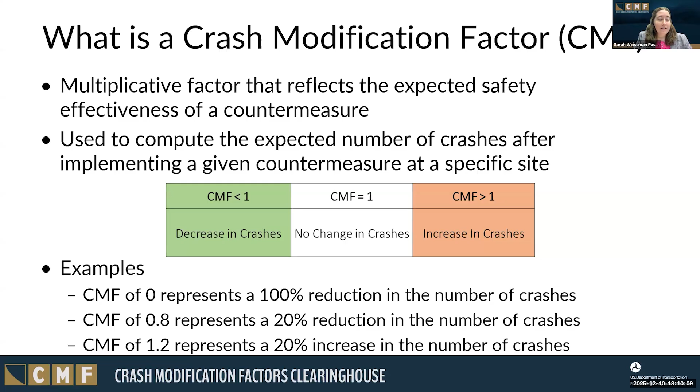The CMF Clearinghouse is a central repository where we strive to store every CMF that has been developed by universities, transportation agencies, and others around the world. It is regularly updated, typically every quarter, and provides practitioners a way to search for and use the good work you all do to improve safety. We also have information posted on the website for your use in working with and understanding the methodology for analyzing CMFs, as well as links to research, case studies, and trainings.

Plus, the CMF Clearinghouse also hosts state-selected CMF lists. Several states have developed their own internal state CMF lists, and generally the states compiled these lists so that there would be consistency in CMF use across their state. These CMFs were identified from the CMF Clearinghouse as well as other resources. Thanh will show you a bit more of the website functionality shortly. Okay, next slide, please.

So poll number 2. We're always interested to learn how you use the CMF Clearinghouse. We have a poll to help us find out how much you use the Clearinghouse. Please answer how often you use this resource in your day-to-day responsibilities. And I believe it's going to ask the second question too.

Next, we'd very much like to understand how users handle multiple CMFs for the same countermeasure. As a clearinghouse of CMFs, it's not uncommon for multiple research studies to calculate CMFs for the same countermeasure, resulting in multiple options, sometimes ranging from a reduction in crashes to an increase. In these instances, how do you, as users, select the CMF you use? Do you select a single CMF or do you combine CMFs? So go ahead and post the poll, please. Let everybody have a chance to respond, and then I will take a look at the results.

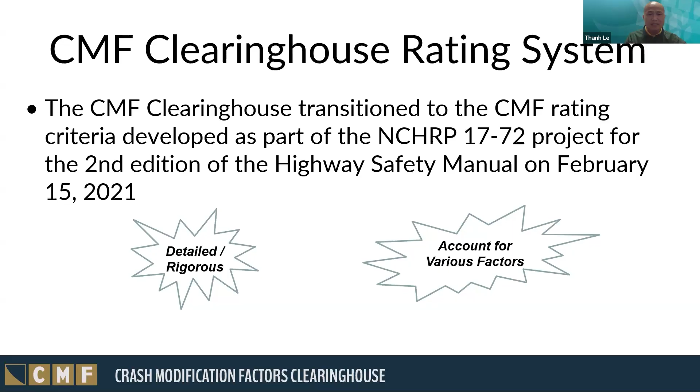So in the website, we will find a section that provides more detailed descriptions of the new quality rating systems, and you can find it from the main page or under the About Clearinghouse menu. And under that drop-down menu, we can find more details in the description of the methods.

So that's all I have on the overview of the Clearinghouse and some of the resources that you may find useful. Please reach out if you have any questions, and we are happy to answer.

Now we move on to Frank, who's going to have a discussion of the challenges, lessons learned, and recommendations for developing combined CMFs. Hey everyone, I'm Frank Gross with VHB. This presentation will focus on how to estimate the combined effect of multiple countermeasures. And this relates to situations where you are considering the use of multiple treatments at the same location. It does not address how to combine multiple CMFs for the same countermeasure. That's a topic for a different time.

In this presentation, I'll try to address these questions, starting with what is the difference between CMFs and adjustment factors. Then we can move on to how to estimate the combined effect of multiple countermeasures and what are the most appropriate methods. And finally, I'll touch on how many CMFs or adjustment factors can you apply at the same time.

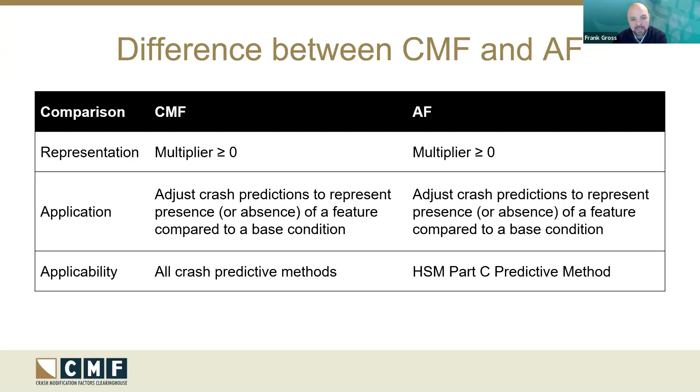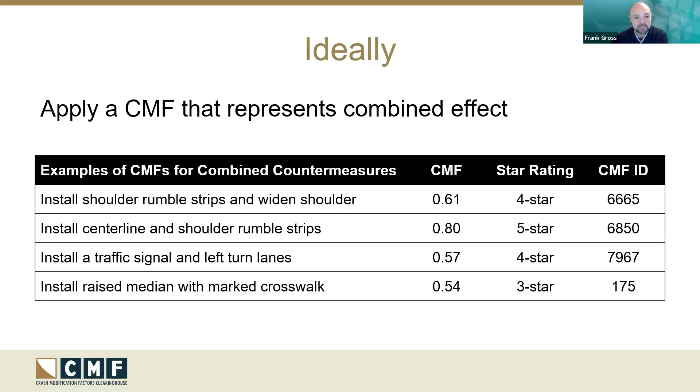For the next part, we're going to focus on CMFs and how to use multiple CMFs to estimate the combined effect of multiple countermeasures. In an ideal world, a single CMF would be available that represents the effect of the combined countermeasures. And if you have that, it's relatively easy to use the CMF to estimate the change in crashes. For example, the CMFs shown on this slide are available in the CMF Clearinghouse to represent the combined effects of multiple countermeasures with a single value.

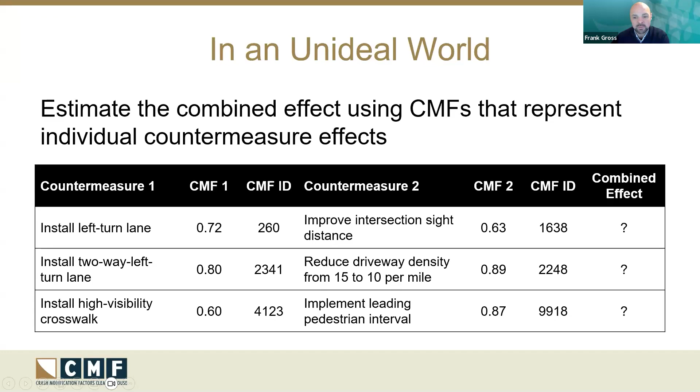However, we don't always live in an ideal world, and you may need to use multiple CMFs to estimate the combined effect. And as far as I can tell, there are not CMFs available for the combined effect of these individual countermeasures. So, for instance, if you wanted to install a left turn lane and improve intersection sight distance, you'd have to somehow use the individual CMFs here to estimate the combined effect.

Hopefully I can shed some light to help you select an appropriate method by completing these steps. First, we define the scenario of interest. Then we understand the limits of the combined countermeasure effect. Third, we determine the potential for overlapping effects among countermeasures. And finally, we can categorize the magnitude of the individual countermeasure effects.

The first step is to define the countermeasures in the scenario of interest. This is going to help you select appropriate CMFs and determine the potential for overlapping effects later. As part of this step, you'll want to identify the general conditions for the location of interest. This includes the roadway characteristics and traffic volume. For each countermeasure, you'll also want to define the target crash type and severity, the applicable time of day, such as day or night, and specific portion of the road, such as a curve to which the countermeasure would be applied.

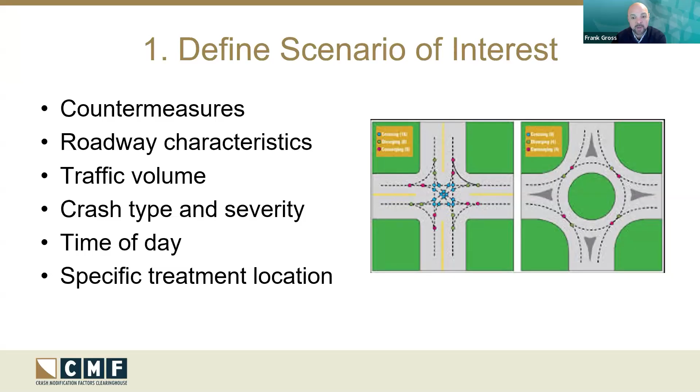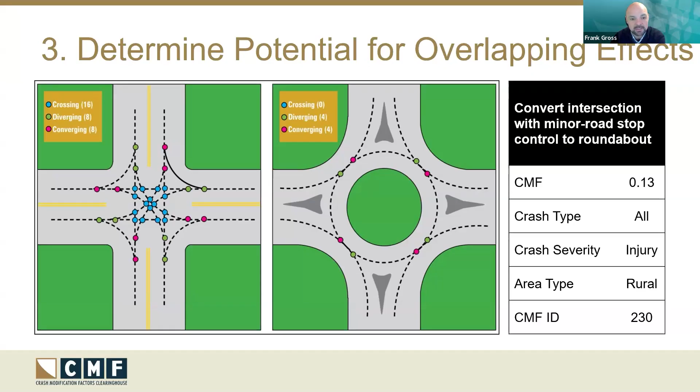So just as an example, an agency may replace minor road stop-controlled intersections with a roundabout, and that's targeting right-angle crashes. A researcher could come along and develop CMFs for injury crashes. And in this case, the countermeasure targets the right-angle crashes, but the applicable crashes associated with the CMF are injury crashes because that's what the researcher used to develop that CMF. And this is an important distinction to remember as we move forward.

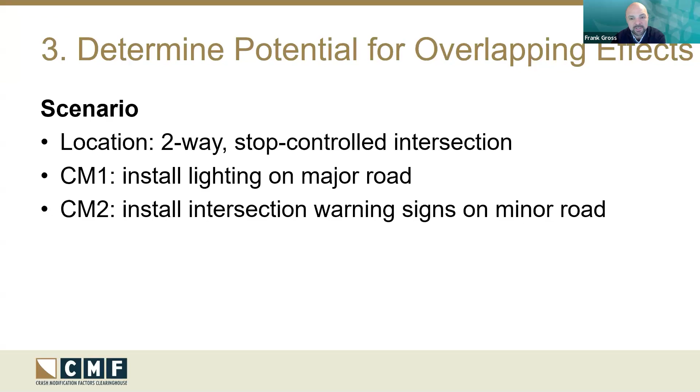Now let's consider the potential for overlapping effects in this scenario. We're installing lighting on the major road and installing advanced intersection warning signs on the minor road of a two-way stop-controlled intersection. So the question is, would there be no overlap, some overlap, or complete overlap? In this case, I think it's safe to assume some overlap because both the lighting and advanced intersection warning signs help alert minor road drivers to the presence of the intersection. But the lighting is only going to help at night. So there's some overlap, but maybe not complete overlap. And as you can see, judgment is critical in this process.

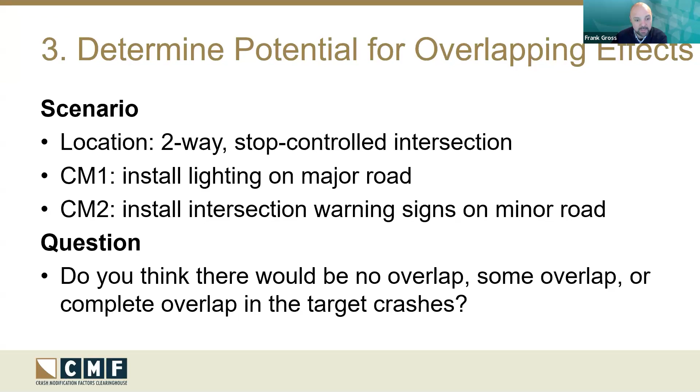So countermeasures may complement, replace, or counteract each other. And your job is going to be selecting the case that best matches your scenario. A zero overlap case represents two completely independent effects where you would expect the complete benefit of both countermeasures. Complete overlap, on the other hand, represents scenarios where the second countermeasure targets the same crashes and severities as the first. So for example, if you widened both the lane width and the shoulder width, this may target the same runoff road and opposite direction crashes.

Third scenario here is some overlap. And this applies to many cases where both countermeasures provide some benefit, but the second countermeasure has some overlap with the first. As an example, cable median barrier and inside shoulder rumble strips on a median divided facility may have some overlapping effects. The cable barrier and shoulder rumble strips both target cross median crashes, but there may be an added benefit from the inside shoulder rumble strips because that treatment also targets runoff road left crashes prior to the vehicle leaving the road.

And as I mentioned previously, if the combined effect is likely to be greater than the sum of the individual effects, this is considered an enhancing effect. I gave examples of installing shoulder rumble strips in conjunction with shoulder widening. On the contrary, when one countermeasure negates the effect of another, this is considered a counteracting effect. And this can come up maybe during highway design exceptions, where a designer may consider installing advanced curve warning signs to offset the potential impacts of reducing the curve radius.

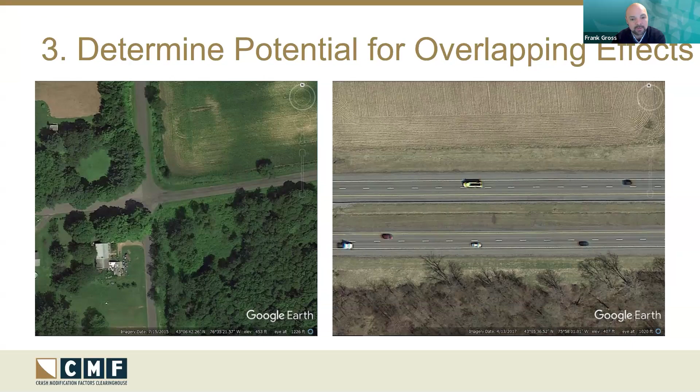If both CMFs are less than 1, then you can consider the potential for overlapping effects. If there's 0 overlap or enhancing effects, then the additive method is most appropriate. And that assumes the full effect of both countermeasures with a maximum reduction of 100%. If you expect complete overlap, then the dominant effect method is appropriate because it only considers the countermeasure with the smallest CMF, which represents the most effective countermeasure.

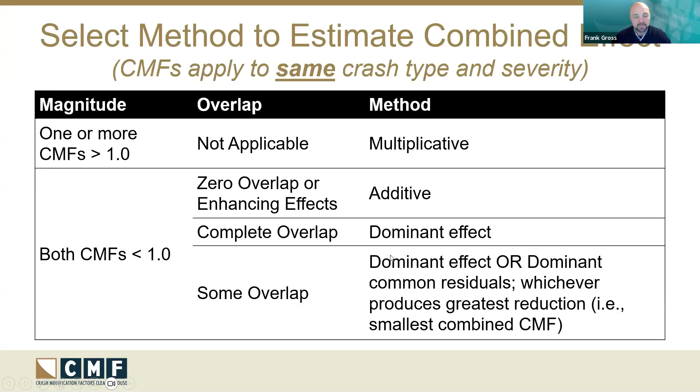You can see that both CMFs are less than 1. So backing up to the previous slide, both CMFs are less than 1. We can automatically rule out the multiplicative method and now consider the potential for overlap to determine if the additive, dominant effect, or dominant common residuals method would be most appropriate. So if we expect 0 overlap or enhancing effects, the additive method is appropriate. I personally don't think that would be the case here, but this is where the judgment comes into play.

If you expect complete overlap, the dominant effect method is appropriate, and you would go with the CMF of 0.8, which is the smaller of the 2 CMFs. If you assume there is some overlap, which is a reasonable assumption in this case, then you would apply the dominant effect method and the dominant common residuals method and select the one that produces the smallest CMF.

So as I mentioned before, the dominant effect method tends to work well when one or both effects are large. That's not the case here. They're both kind of in that small to intermediate range. But let's see how this plays out. As we said, the dominant effect method here would select the CMF of 0.8 or a 20% reduction in crashes.

The dominant common residuals method is shown here, which multiplies the 2 CMFs together and raises it to the power of the more effective countermeasure. So that produces a CMF of 0.76, which is smaller than 0.8, and we would go with the result from the dominant common residuals method in this case.

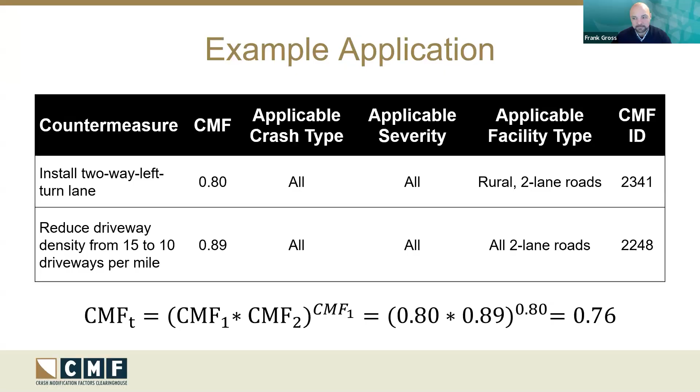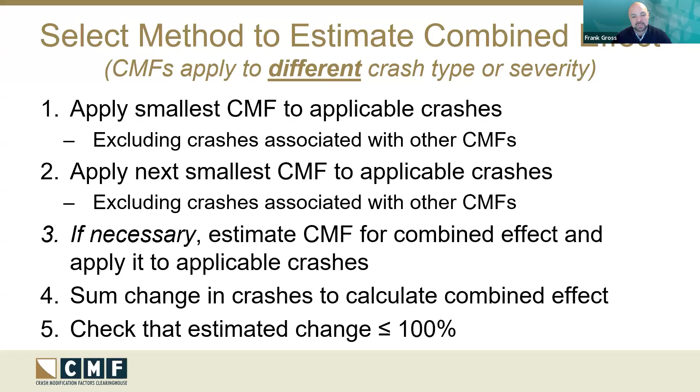If the CMFs apply to different crash types or severities, then you would need to use this 5-step process to apply the CMFs individually to the applicable crashes and then aggregate the results. So I won't read through all of these steps, but the key is to first apply each CMF individually to crashes that are applicable to that CMF, but not to the other CMFs. Then estimate the CMF for any combined effects and apply it to the crashes that are common to both CMFs. And finally, sum the results and check that the combined effect is not greater than 100%.

So just to see what that looks like, let's put some numbers to this example. In this case, there's 9 total crashes, and those include 3 cross median, 4 run-off-road to the right, and 2 sideswipe same direction crashes. CMF1 applies to crash group 1, and CMF2 applies to crash group 2. So from here, we can apply the CMFs separately to the applicable crash groups and estimate the change in crashes. And since neither of the CMFs apply to crash group 3, which was sideswipe crashes, we can assume no change in those.

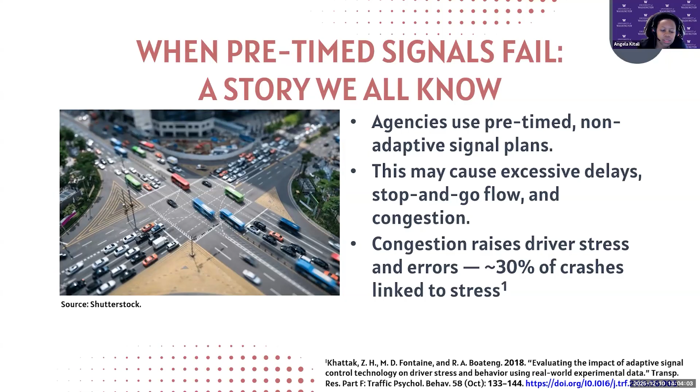So this is exactly why adaptive signal technology was developed. The adaptive signal system replaces fixed pre-programmed timing with continuous data-driven control. So the green time follows demand and not a schedule. Beyond travel time savings, adaptive signal systems reduce stops and delays, which eventually can translate to safety benefits and even lower emissions. In addition, because these systems use real-time inputs, they can support specific operational priorities.

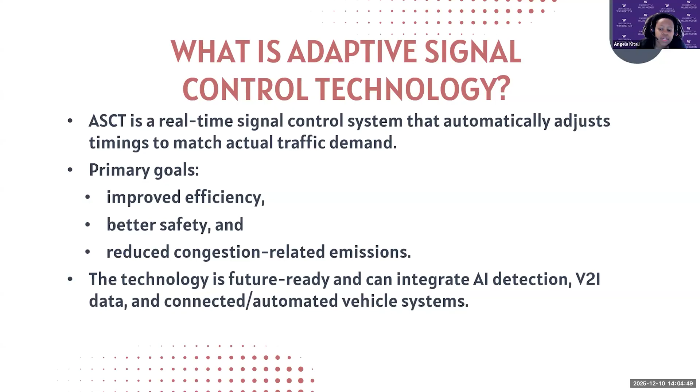For instance, giving buses extra green time, protecting pedestrians during peak crossings, or even ingesting vehicle-to-infrastructure data to prepare corridors for connected and automated vehicles. So how does this system work? In summary, first, a network of detectors, such as loops, cameras, etc., continuously measures parameters such as volumes, speeds, queue length, and others. This live data is what tells the system where congestion is forming. Then the controller ingests those feeds, filters noise, and computes current demand and short-term trends. So it essentially identifies which approaches are oversaturated or undersaturated and where backup is forming.

Next, the optimization engine reassigns green time and, if needed, changes the phase order or cycle length. Of course, this change follows some specific goals that transportation agencies have set. For instance, maybe minimizing delays, stops, or prioritizing buses. Finally, the controller pushes the new splits and plans to the cabinet and signal heads using smooth transitions so that drivers aren't surprised. So this is a continuous loop, and the primary focus is to ensure that the green time follows demand rather than a fixed schedule. So at this point, let's imagine that adaptive signal control is a smarter traffic manager that watches the road and tweaks lights in real time.

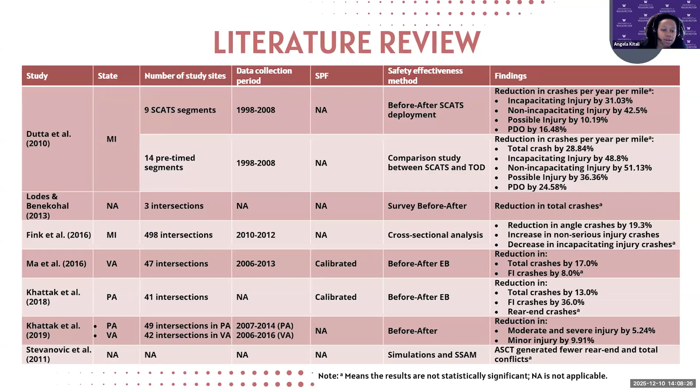So overall, what we can conclude really is results suggest that adaptive signal systems can improve safety, particularly for total and rear-end crashes. But we also found that only a handful of studies have looked at the safety impacts of the adaptive system at the time of our study. And many of these findings are inconclusive or they have mixed results.

We can also see from the table that most of the past evaluations relied on calibrated Highway Safety Manual safety functions and simple before-after empirical Bayes designs, which of course are a reasonable start, but they have some limitations. One of those limitations is they omit important variables and confounders, so we need a more robust approach. And that's exactly the contribution of our study.

So our study fills the existing gap in the literature using an empirical Bayes before-after evaluation with comparison groups to quantify the safety effectiveness of the adaptive signal system. So the use of the comparison sites in this case accounts for the effect of other variables that influence changes in crash frequency at the treatment sites that are independent of the treatment itself.

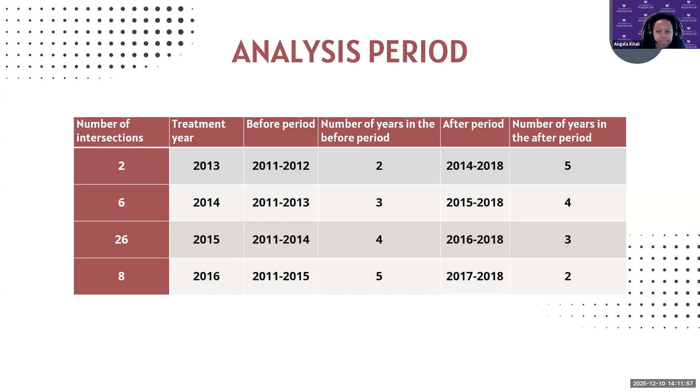There are 2 main types of SPFs: what we call the simple safety performance function that just uses traffic volume, and a full safety performance function that uses several factors. So in this case, we use traffic volume, geometric characteristics, land use information, and even signal phasing. So the full SPF gives a richer, more realistic counterfactual because crashes aren't driven by traffic volume alone. Another step that we took while developing our SPF was to account for the overdispersion. So we used a negative binomial regression.

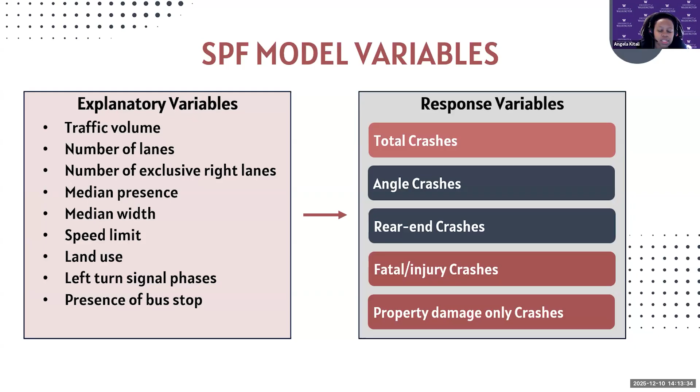So the negative binomial model has an overdispersion parameter, which we then used to compute the empirical Bayes weights. So this weight balances the predicted counts and the observed counts when estimating the treatment effect. As we can see in the slides here, we built the SPFs and the CMFs for multiple crash types.

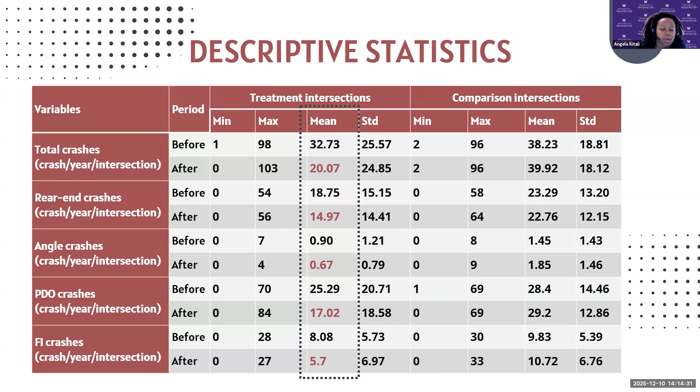So in the next slides, I'll walk you through the empirical Bayes results and CMFs, which will help us understand whether these reductions hold once we account for things like regression to the mean and other influences. In this study, we used what is considered the gold standard approach for evaluating safety treatments: the observational before-after empirical Bayes with a comparison group. So this is a two-step methodology.

So as I mentioned earlier, to understand why we really need this method, we need the SPFs. The SPFs help us answer the question of what would crashes at these intersections have looked like if the adaptive signal systems had never been installed. Of course, we really can't go back in time and observe that scenario directly. So instead, we build what is essentially a scientific best guess using the SPFs.

So SPFs are nothing but crash prediction models, and they tell us how many crashes we would normally expect at an intersection based on several factors. So by building the SPFs from the comparison sites, we can estimate the number of crashes that would have occurred at the treatment site in the after period had the adaptive signal system not been deployed. So once we have the expected crash counts, we then estimate the crash modification factors.

So as indicated earlier, a CMF is simply a multiplier. If it's less than 1, it means crashes went down. Greater than 1, it means crashes went up. As we can see in our analysis here, we estimated CMFs in several ways. We first looked at the CMF as a single unit using all the 42 treatment sites. And then we looked at the 2 separate systems of adaptive signal control in our study to see whether their safety effects would differ.

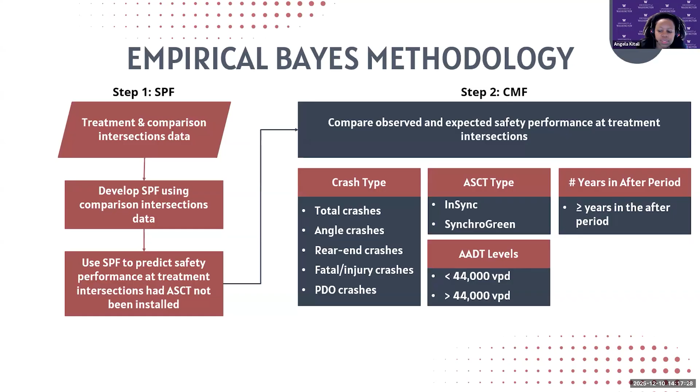One, the empirical Bayes method adjusts for the regression to the mean. This is the tendency for unusually high crash locations to drift back toward more typical levels over time, even without any treatment. And second, the use of the comparison groups helps us capture broader influences that could affect crashes at both treatment and comparison sites.